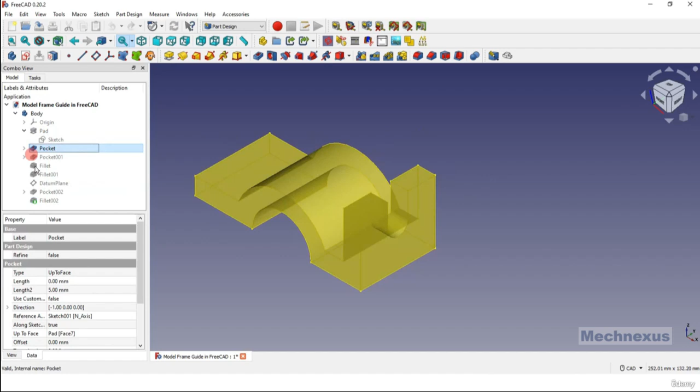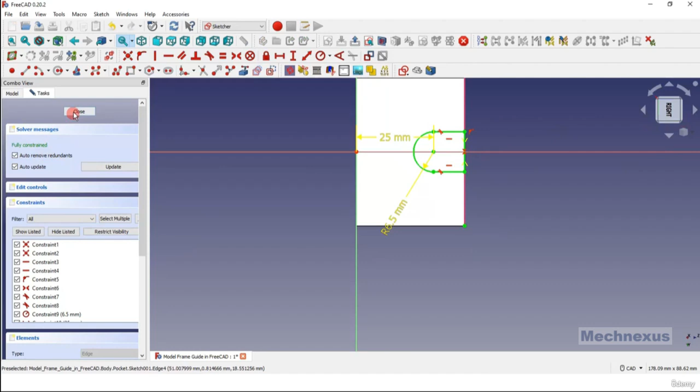So our first feature is this extrude, and then I created this pocket. If I go to my first feature and change this dimension, suppose I make it from 41 to 35 and close it, this cut has already been modified with respect to my height change.

And if I again make this height 41, you can see that this slot got bigger here. So this is parametric design, which is driven by parameters and constraints. What we have changed here, the dimensions and constraints, are nothing but the parameters. So this is the parametric nature of FreeCAD.

Now the fourth feature of FreeCAD is modularity. FreeCAD is designed with a modular architecture, allowing users to customize and extend its functionality through plugins and modules, and this makes it versatile and adaptable to various design workflows. So let's understand this in FreeCAD.

If you go to FreeCAD, then Tools and Add-on Manager, here you will get lots of workbenches which you can use as per your requirement. For example, for assembly in FreeCAD, we have multiple workbenches like A2plus and Assembly 4,

whereas if you go to any paid software like SolidWorks and Inventor, there you will only have the option to use the assembly constraints which come with the software installation. But in FreeCAD it is not like that. You can choose an assembly workbench as per your choice.

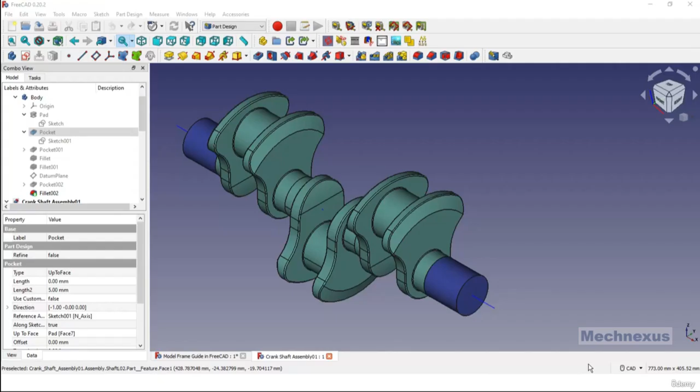So here is an assembly of a crankshaft which I have made with the help of the Assembly 4 workbench, and we will see this tutorial in our course. But you can make the same assembly with A2plus or Assembly 3 as per your choice. That's why FreeCAD assembly design is very flexible. You can use the assembly workbench which you are more comfortable with.

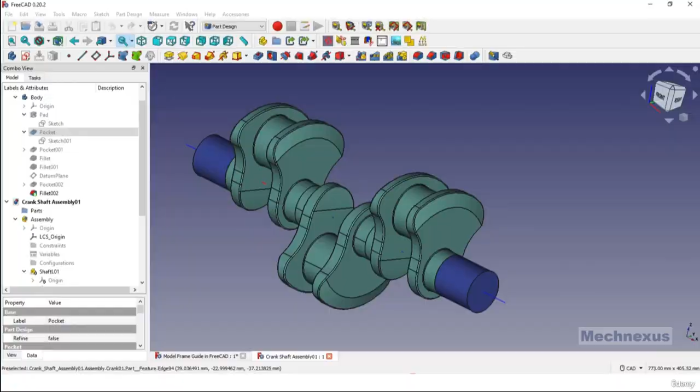Next is the mesh modeling. Mesh modeling is basically used for 3D printing, and in FreeCAD you can edit an STL file. Like if you go to FreeCAD and I wanted to open this part, then we have the dedicated workbenches where you can use tools like 3D printing tools to convert your design into reality.

Next feature is Python scripting. FreeCAD is scriptable with the help of the Python programming language, which allows users to automate tasks, create custom tools, and extend the software capabilities. When you launch FreeCAD, you will have the option to enable Python scripting. After the installation, you can directly click on the Python console and run Python scripts right from here. Python is a very powerful language, as we know.

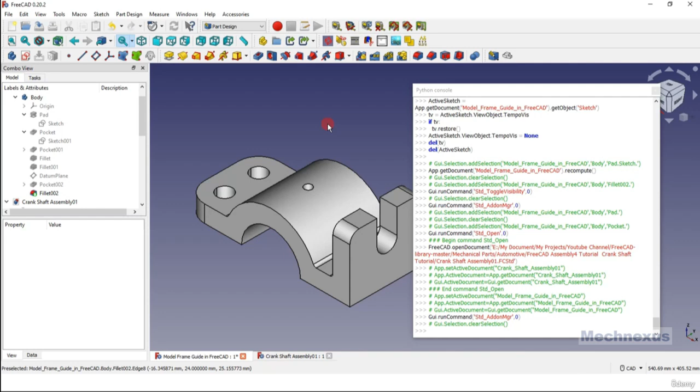And from my point of view, FreeCAD is the only parametric modeler which is available open source and powered by the Python programming language. So we can do so many things with Python scripting, like create animations or create our custom tools. As it is a very deep topic, it is not recommended for the beginner user. Once you complete my course, you can learn Python scripting and do some advanced things with FreeCAD.

Next one is community and support. FreeCAD is open source, and FreeCAD has a very strong community of users. For example, if you go to the Reddit page of FreeCAD and put your questions, definitely you will get a reply. On the FreeCAD website you can find the various community supports of FreeCAD, like Reddit, Twitter, Facebook, LinkedIn. You can approach the community members, and they will definitely help you. So that is one of the awesome features of FreeCAD.

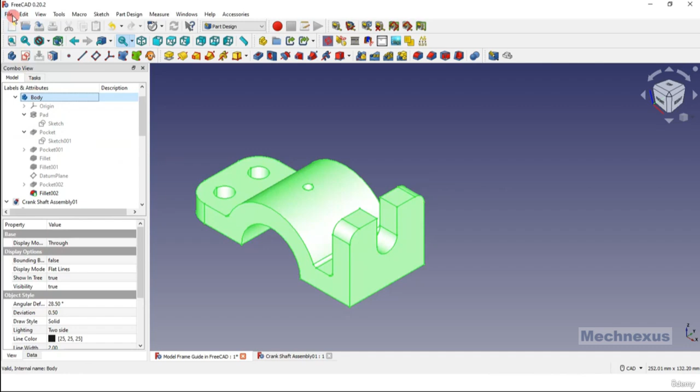Another feature of FreeCAD is that FreeCAD supports a variety of file formats. For example, if I select my body and go to File and the export option, you can see that FreeCAD supports all the major file formats like STEP, IGS and STL, which are the most common file formats used by any software. You can export your file into STEP or IGS and open it in other 3D software like Autodesk Inventor or SolidWorks.

So that is the main benefit of FreeCAD. It supports all file formats, from 3D printing to surface file formats like IGS and solid formats like STEP.

Education value. FreeCAD is open source. Many software companies charge students a nominal fee to get the license of their software, but in FreeCAD there is no such limitation. College or university students can just download FreeCAD and do their college projects in FreeCAD.

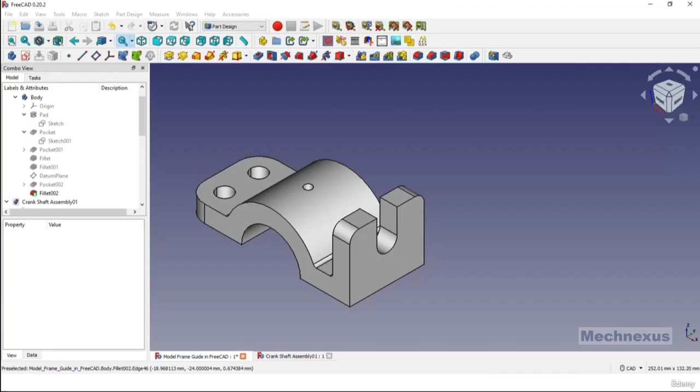Next feature of FreeCAD is continuous improvement. If you go to FreeCAD's official website, you can find that FreeCAD has a long history of development. It is not a software which was just invented 2 to 3 years back. You can go to the official website of FreeCAD and the Wikipedia page and study more about the FreeCAD history. FreeCAD is improving day by day.

And we will come to the conclusion. While FreeCAD offers many advantages, it has its own learning curve. Let me clarify one thing here. FreeCAD is not as easy as SolidWorks, but once you learn FreeCAD and understand its power, you are definitely going to love it, because it is very robust and provides lots of flexibility to customize it with the help of the Python programming language.

If you have used software like SolidWorks and Autodesk Inventor, you may have experienced that you cannot customize it as per your requirement. And in FreeCAD, you do not have to purchase different versions. In simple words, if you are using SolidWorks and want to do analysis, you have to pay extra money for the analysis feature or CAM feature. But in FreeCAD there is no such limitation.